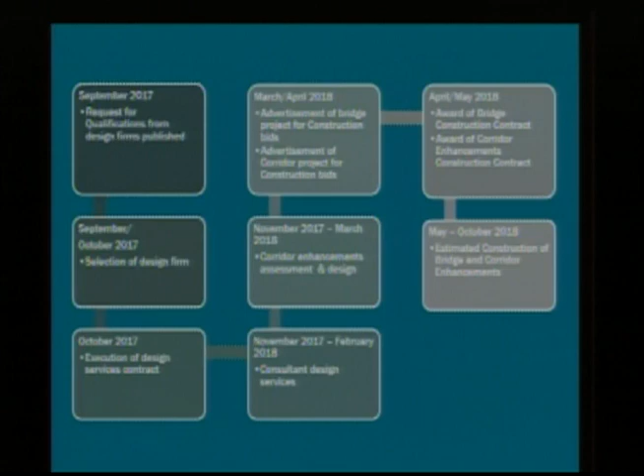So starting out, we're talking about the 3rd Street Corridor. As the mayor mentioned, this is not a discussion about the bridge specifically, but this began with the bridge in the budget last fall or last summer. You've seen this chart before, for those council members who were here in the fall. This was a flow chart, if you will, of the processes we're going to be proceeding through as it relates to both the bridge design development and the corridor work.

It really began in September of 2017, and these first 3 or 4 tasks are actually all complete now: requesting qualifications for design firms for the bridge, selection of design firm, execution of a design contract, and then the design process, which is actually underway for the bridge at this time.

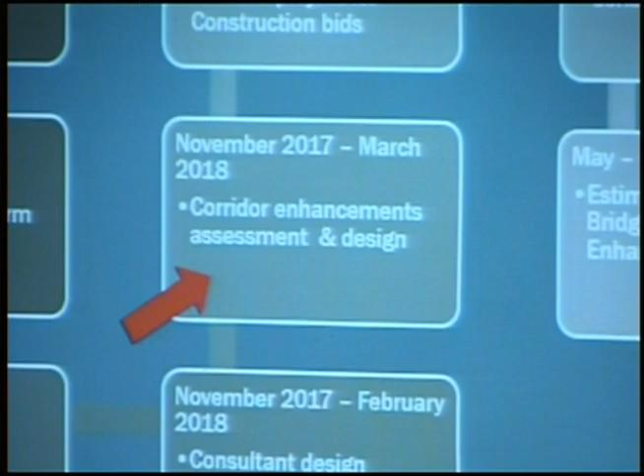The item we're here to talk about tonight is this one in the middle, which relates to the corridor enhancements assessment. We're right in the middle of this process where we've been working on the assessment, and depending on how the conversation goes this evening and what direction we may receive as staff, the next step would be to step into design services.

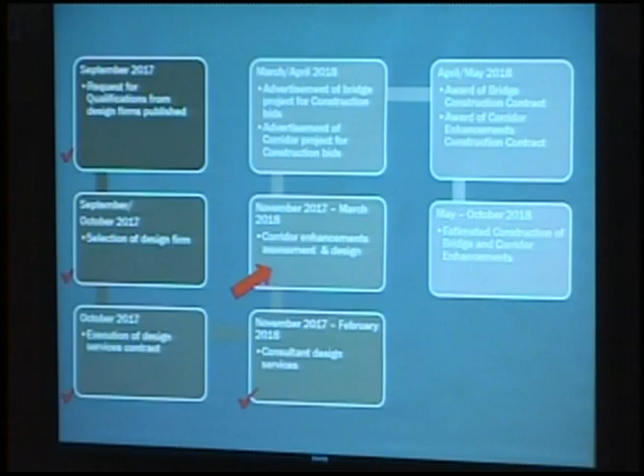Schedule-wise, that's anticipated to run through probably the March timeframe, give or take, anticipating that in the March-April window is when we'd be taking both projects out to bid for construction bids, awarding those roughly in the April-May timeframe, and then looking at construction of the bridge and the corridor improvements concurrently through this coming summer, with finishing of those 2 projects in the fall of 2018.

One of the tasks we have undertaken as staff is looking at doing an assessment of the corridor and trying to determine how best to manage any potential changes that may occur within the corridor. We made a request to the Transportation Commission to assist in that process, and the Transportation Commission agreed it probably made sense to form a subcommittee to do a deep dive into the subject matter, because there's a lot of things to consider when looking at a corridor and traffic management, traffic calming type features. So a subcommittee was formed consisting of 10 individuals.

We also brought in Mike Lowry as our technical advisor, outside tech advisor. He's a professor in civil engineering at the University of Idaho and does a lot of things related to the multimodal aspects we're looking at in this corridor, particularly bicycle transportation. And then I continued in my role as staff liaison to round out the group.

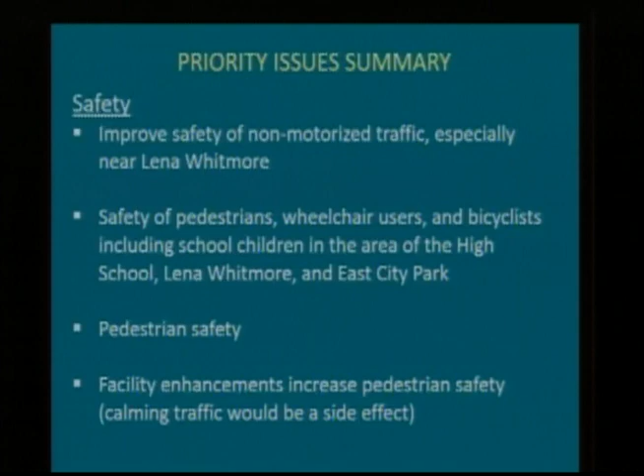And that we did enhancements to the facilities that would promote that safety and use of the system. They also talked about bicycle safety and really looking at it throughout the length of the corridor. Somebody suggested protected bike lanes in that early process, and then generally looking at what goes on around the schools and creating that overall complete safe network for people walking.

I should mention that in your packets tonight there is a table that has a list of all these types of things as well as some others, and kind of the status of what the subcommittee reached in terms of their discussions. Some of them they completed, some of them they just didn't have time to look at. Others they looked at some and said, we're not going to reach a conclusion, but it's just an item to think about.

The next grouping was really in the multimodal aspect or access, so this is a similar aspect with respect to safety, looking at all modes of transportation within the corridor. They wanted to encourage non-motorized transportation options.

They did identify, at least some of the members, that bike travel should be prioritized over on-street parking. That becomes a critical component as you look at some of these plans, because some of them do put in bike facilities at the expense of on-street parking.

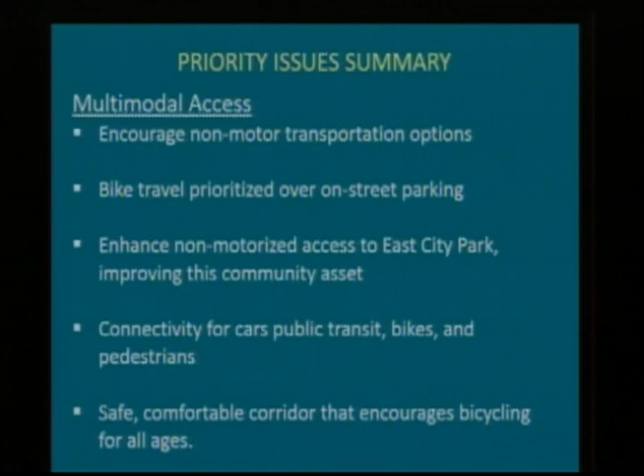Talked about enhanced access to East City Park, general connectivity improvements for really all modes, transit, bikes, pedestrians, and then creating that safe, comfortable corridor for the bicycling community.

The next grouping was limiting impacts. They understand that changes in the corridor have the potential to cause impacts to the users, to the adjacent neighbors, to the activities that occur within the corridor itself.

So they identified that there are residences and institutions, being things like the schools and the church, that are along the corridor itself. The concern about what is the impact of removing parking on the street adjacent to some of those uses.

They also, somewhat to the other side, said, this is a vehicular corridor, and we do have to remember that. And so we don't want to do things that are going to restrict the traffic flow to the point that it's not functional. So not overly limiting traffic flow was identified.

There were suggestions about truck routes and the thought of, is there some need to or ability to remove trucks from this particular corridor? And they talked about that some, but in the end did not reach a final conclusion for what to do with trucks.

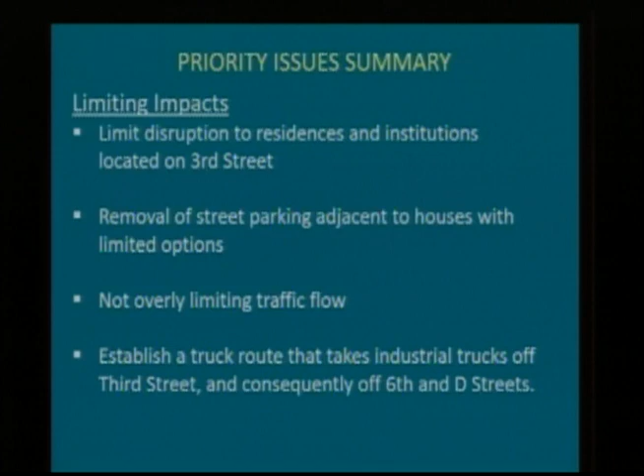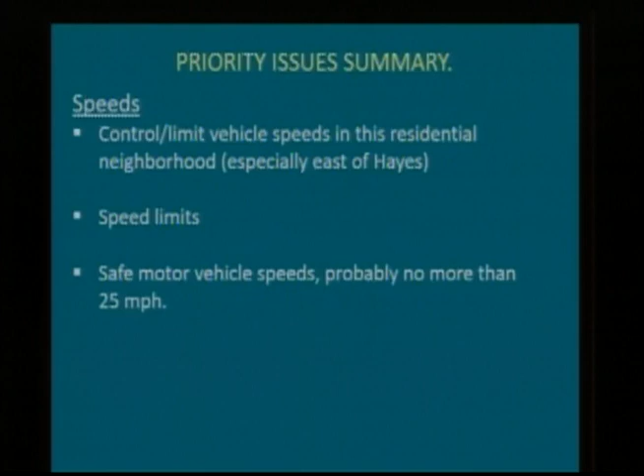Speeds were the next one. They wanted to make sure that we did control and limit speeds within the neighborhood, particularly east of Hayes, where it's going to see really the most significant changes in character of traffic that's out there today. Generally just looking at speed limits overall, and the suggestions were made early about limiting speed to 25 miles per hour.

They looked at traffic volumes historically, current numbers we were seeing, and accident history throughout the corridor, including bicycle accidents. There were 4 or 5 over about a 10 or 11-year period throughout the length of the corridor. They also looked at adjacent land uses and what effect we could have on those uses, plus the general modes of travel within the corridor.

They spent some time on the bicycle route and facilities plan, keeping in mind that the 2016 bike routes and facilities plan adopted by the council specifies 3rd Street as an intermediate level bike route, generally meaning higher volume or higher speed on that particular route.

They looked at the sidewalk system, whether or not it was complete — it is not. They talked a little about the lighting out there, street trees, truck routes, the kind of things that perhaps could be looked at some point, and then intersection traffic control, so whether there are 4-way stops, 2-way stops, things of that nature.

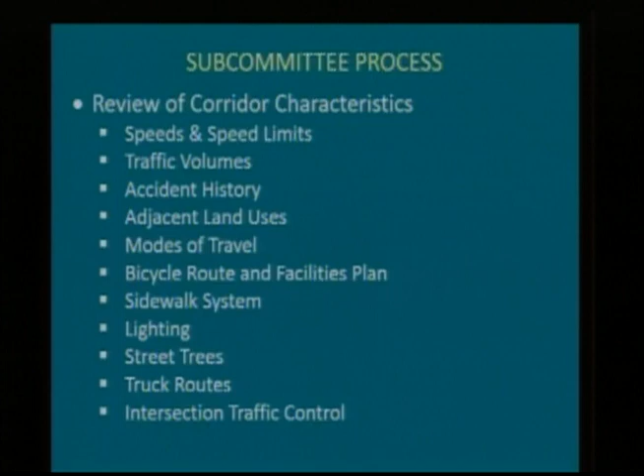In the end, the subcommittee developed 3 plans, titled Plan A, Plan B, and Plan C. Their general preference was Plan C, and a little later on in the presentation I'll go through some of the details of what's in the plans.

At this stage, I'm just taking you through the process of how we got to this evening, so you'll understand all the things we've gone through, how the public input process has worked, and then we'll dive into the details of the plans themselves.

After that 4.5-week intense period of time, we went back to the Transportation Commission at their meeting on December 14th. The commission felt comfortable with the 3 plans developed by the subcommittee and recommended that we start the public input process.

The public comment period was officially opened on December 20th, and on the 21st we finished a City Hall display right out here in the hallway outside of the City Council chambers. That display was in place all the way through the end of the comment period, roughly a little better than 4 weeks.

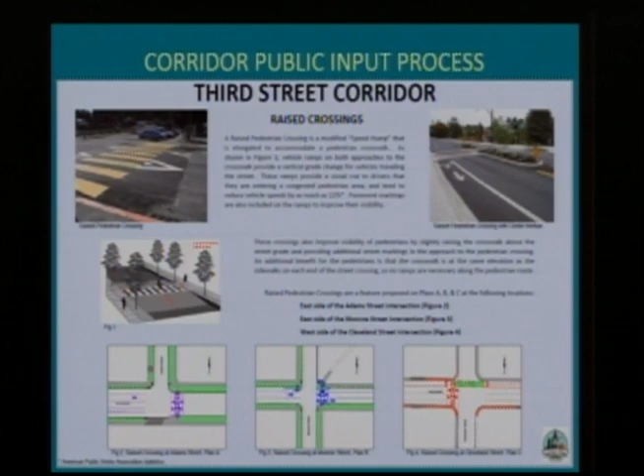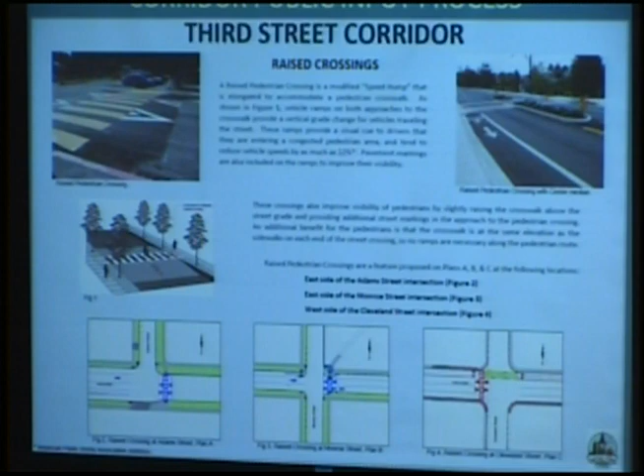Within that display, there were a series of poster boards that looked something like this one. This is one example. They all had specific topics that talked about either the plans themselves, what the commission was doing, or individual items within some of the plans. There were 12 of them in all on display in the hallway.

Things like this subcommittee board discussed what the subcommittee was doing. The overview talked about some of the common features of all the plans, then each of the 3 Plan A, B, C concepts, and then you get into the more specific items or individual components within some of those plans.

This is where things like separated 2-way bicycle lanes were introduced, which is a new feature within the city of Moscow. And then finally, a project cost, preliminary cost estimates for the 3 plans.

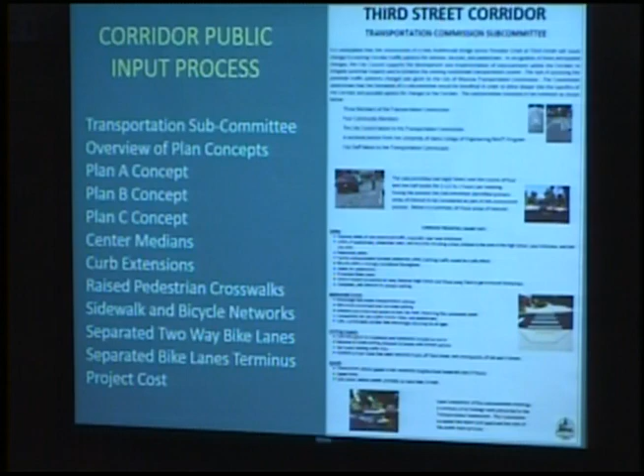This is just a shot of what it looked like as we were finishing setup. We weren't quite done, a couple of posters missing yet, but we had the posters on the walls all the way around, and a comment box set up here with cards on this long sheet.

This is about a 22-foot long plot of Plan C in this case, because that was the preferred one. Also on this table, there are 3 booklets on either end that have the complete plan sets for A, B, and C. And then we had this interesting little floor graphic here.

Plan C is the 2-way separated bike lane, and at its narrowest location, it is 3.5-foot wide lanes and a 1-foot wide buffer. This is a life-size replica of what that would look like on the street — 3.5-foot wide lanes from essentially a curb line to a center stripe, 2-way bike traffic, and this 1-foot wide buffer with some vertical elements between the bikes and where the cars would be.

So we did that to try to give folks a visual understanding of just how big that is. When you see things on paper, they don't always necessarily relate to what it physically would look like on the ground. So that was a feature that we included in that display.

We also held 2 open houses here in the council chambers, the first on January 11th, the second on January 18th. In those open houses, we put out the long strip plans, the 22-footers, for plans B and A, as well as some additional poster boards with these categories.

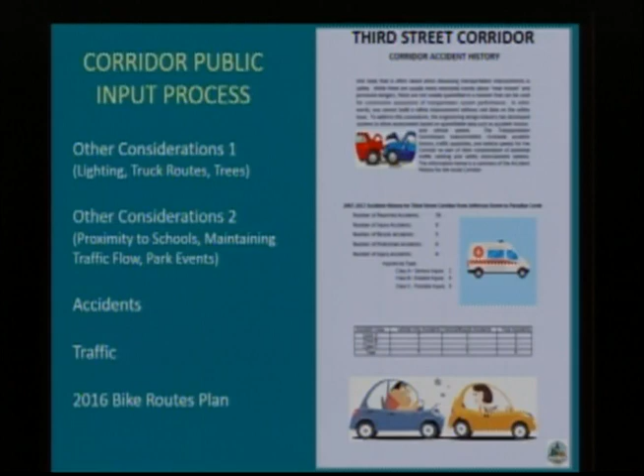We also had some boards with information on the accident history, traffic flow volumes, and the 2016 bike route plan. So that was part of the open house process on those 2 dates.

In the end, the public comment period closed January 21st. This date required the relocation or rescheduling of the Transportation Commission meeting for January. They pushed it back two weeks so we could have a couple of weeks after school started again at the university, so everybody was back in town, giving them time to participate, so it wasn't all during a holiday break when people were out of town.

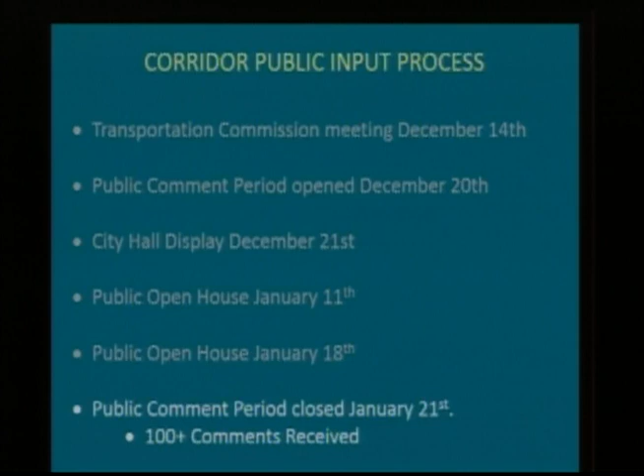In the end, we received a little over 100 written comments in the system via email and comment cards. Of those, about 40% stated a preference for a particular plan option. Some said this one or that one, A and B typically, but the large majority, roughly two-thirds, preferred Plan C out of the three options proposed, which is the two-way separated bike lane.

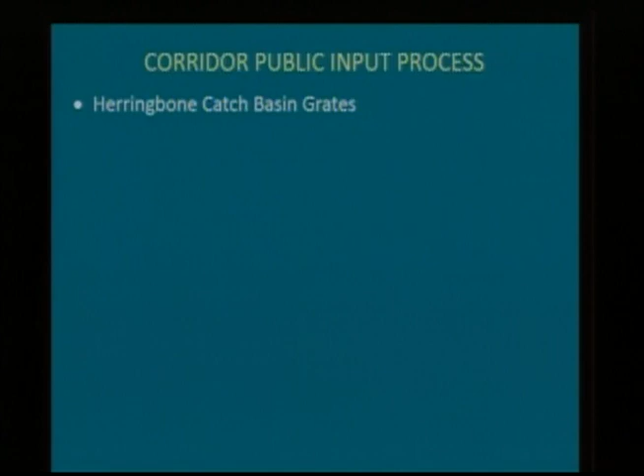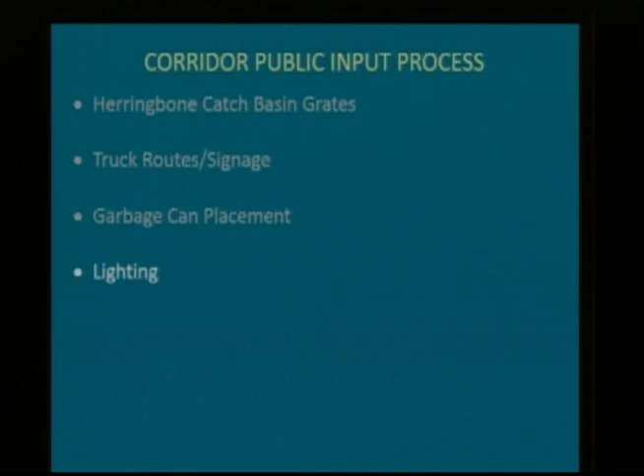There were other comments that popped up, things to think about as we go along. One was cleaning up some of the catch basin surfaces so they are not wheel catchers for bikes going across them with some of the grates. Again, addressing issues like truck routes and signage. Where do the garbage cans go? What do we do about lighting? Will there be improvements? A lot of these were just questions, with some comments upon them.

Some concern, fairly common, regarding what happens when we remove parking, particularly around the high school and the 1912 Center. Those are areas that are highly congested, with a lot of parking demand. Some concern about after-hour events, particularly at the 1912 Center — if we lose any parking within the corridor, that could have an impact. And events, particularly at East City Park, also a potential impact if some parking is removed in that area. So there were questions and concerns about loss of parking or potential loss of parking.

There were comments as well about general congestion at the high school with Plan C in particular, with the multiple lane aspect — are we going to create issues where there could be more conflicts? And another issue that came up a number of times was maintenance concerns, particularly how do you remove snow? That's primarily related to Plan C, which has more challenges than the other two with respect to snow removal, leaf removal, and things of that nature.

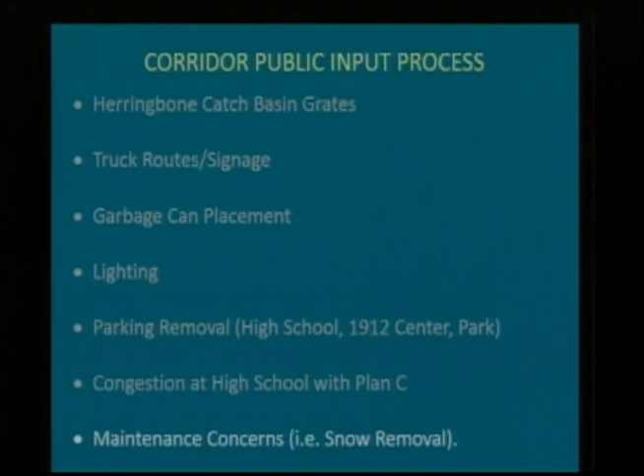The Transportation Commission then met on January 25th and went through the input that had been received. They all received in advance a summary of all that input and the actual scans of the individual documents submitted to us. Quite a bit of information — it's in your packets tonight as well. Hopefully you've had a chance to look at it.

The commission then talked about where do we go from here and what did we hear from the people? What should we now do? In general — and I'll generalize here because I don't necessarily want to speak for the commission — they did not seem to really favor Plans A and B. They did prefer Plan C, but there was some consternation about it, and they spent a lot of time talking about how best to address the issues of maintenance and overall safety.

On the maintenance aspect, it's that question of Plan C having a vertical element within the road section. So you cannot plow the entire road to the outsides — you have to plow one side of that vertical element or the other. It just complicates things and how best to manage that.

The safety aspect really relates to turning movements and what to do at intersections. When you've got multiple lanes of cars and bikes going through an intersection and a vehicle wants to turn off, or a third comes from a side street, we need to make sure there are no conflicts that create safety problems. They spent quite a bit of time struggling with how to manage it and where ultimately to end up in a recommendation. They did discuss briefly, a couple of times through the meeting, other alternatives.

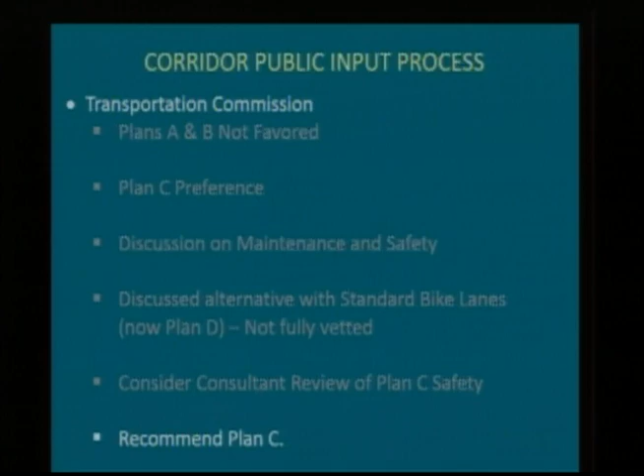That was something they seemed to like the concept of. They did not take any action with it. It's not part of the recommendation, but it did meet with some favor. Ultimately, after an hour and a half of gyrations on what to do, they went pretty simple and just recommended Plan C. So that is the Transportation Commission recommendation, Plan C. They did ask that we provide a good listing of pros and cons of each of the plans and concepts, and that's what's in your packet this evening, hopefully capturing the positives and negatives of each.

So to talk a little bit about what's in the specific plans, and then we'll talk a little about budget, and I'll wrap up.

There are some elements common to all 4 plans - things that regardless of which plan we choose, or even an alternative, we'd propose be included. First, speed limits. It was pretty unanimous among everybody we spoke with that the speed limit, currently 25 on the west end and shifting to 30 miles per hour in the center section from Van Buren to Hayes, then dropping back to 25 out to the east, be changed so it's 25 miles an hour the whole way from Washington to Mountain View Road - same speed limit the entire length. I hadn't run across anybody with any issue doing that.

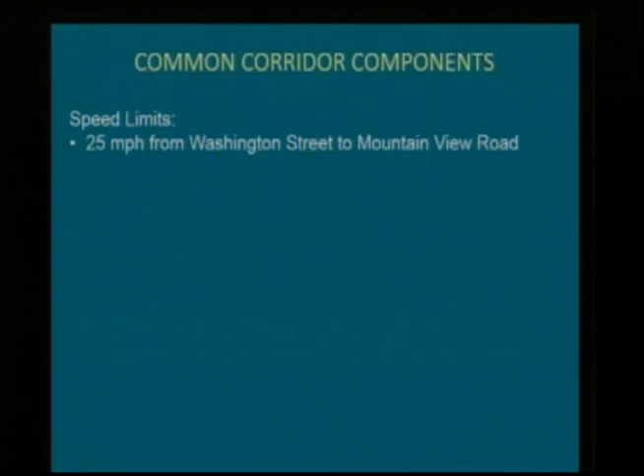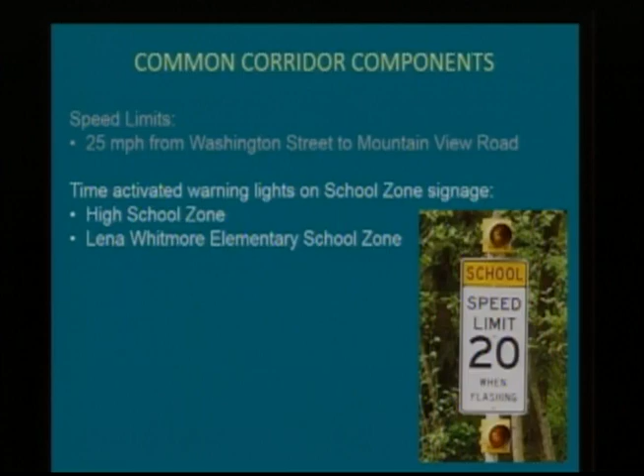One concept common to all plans is adding time-activated warning lights, like bouncing ball light systems, as an added visual cue on the school speed zone signs. When we looked at traffic speeds, the area with problems was at the high school, where speeds were quite a bit higher than they should have been, even though the rest of the corridor fit the speed limit signs pretty well. So we felt adding additional lighting on those signs to raise driver awareness of the school zone would be beneficial.

There are two of these locations, the high school and Lena Whitmore Elementary School. We'd suggest these run on a timer basis: in the morning just before school starts they'd be on, then turn off once school begins, come back on during lunch, then off again, and come back during the afternoon session when school's getting out, then turn off.

One thing we've found, common in the traffic industry, is that if you leave something on constantly, pretty soon it just becomes background and you don't even see it anymore. A lot of folks probably don't notice the blinking light above Adams Street right now, but it's there. If the lights come and go, they're more likely to catch your attention. So it's just an added influence.

Again, in all three plans, raised pedestrian crossings are a true traffic calming measure. American Public Works Association studies show a 12 to 18% decrease in speeds due to these kinds of devices. We're proposing three of them: the east side of the Adams Street intersection, the east side of Monroe Street, and the west side of the Cleveland intersection. I'll show you those locations in just a second.

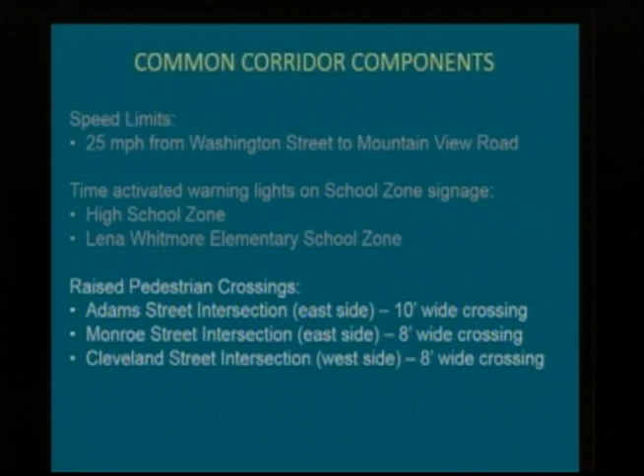They vary a little in width at the top of the structure and the width of the crosswalk itself. Generally, there's a road section with sidewalk on either side and a ramp that comes up. The street elevation rises from the gutter up to the height of the curb, matching the sidewalk on either side, goes flat for a while—8 or 10 feet wide in our case—then ramps back down to normal elevation beyond that.

This vertical ramp element isn't very comfortable if you take it too quickly, and the steepness of the ramp affects that—so if you're going too fast, hitting it is not a comfortable feeling, which helps slow people down, the whole idea of traffic calming. Through some of the markings you'll see, it also improves overall visibility of pedestrians, which is important at these key locations.

Here are a couple quick pictures: you can see a ramp, a marked crossing at the top, and a ramp down the other side. This is the standard marking on the ramp portion—as you approach as a driver, you see white chevron markings facing you, as well as the crosswalk ahead. From the pedestrian's perspective, there's a ramp coming up on either side, then a straight shot at level grade across the street.

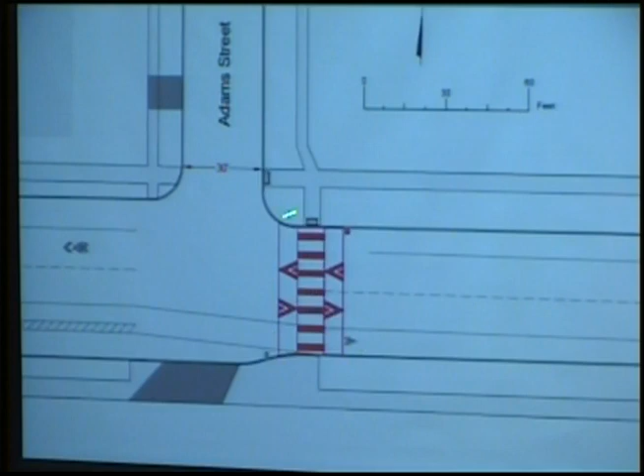As far as locations, Plans A and B, and actually all the plans, have a crossing at Adams. This rendering is the same for A and B: on the east side of the intersection there's a 10-foot-wide crosswalk with ramp up and ramp down construction. In the Plan C version with two-way separated bike lanes, it fits just as well—it works in any of the plans we've proposed. The second location would be at Monroe, south of the high school, by the 1912 Center.

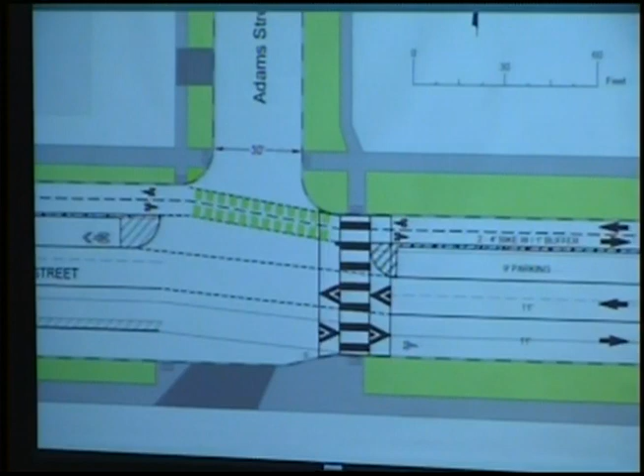Very busy crosswalk—this is the southwest corner of East City Park at Adams. Felt it would be a good location there as well.

This particular drawing is from Plan B, which has some curb bulbs involved. Plan C, again, with bike lanes going through, works well.

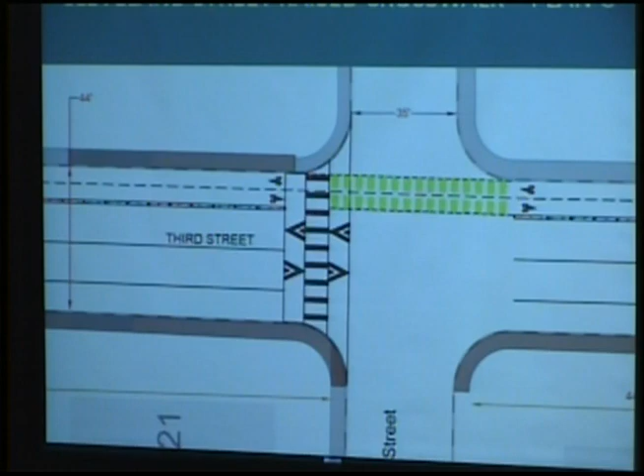The next location is out at Cleveland. Cleveland is on the east side of Lena Whitmore, behind the park area and playground, and there's a lot of kids that come up this way into the back of the school. That's why they chose this third location as a spot for a raised pedestrian crossing.

Other common corridor components: intersection traffic control. There was fairly unanimous discussion about changing the traffic control at the Hayes and Blaine Street intersections to four-way stop control. Today at the Hayes intersection, third street stops but Hayes does not. At the Blaine intersection, same thing—third street stops, but Blaine does not. These two intersections were seen as pretty important locations with high pedestrian traffic.

Generally speaking, the Hayes intersection is likely to see fairly even vehicle load distributions coming from north-south versus east-west. Four-way stops work well in those situations, and it's also another method for improving overall pedestrian safety at these busy intersections. Blaine, of course, is just south of Lena Whitmore, with lots of elementary school kids going through there, so we felt that was a good place to put emphasis on managing traffic and traffic speeds.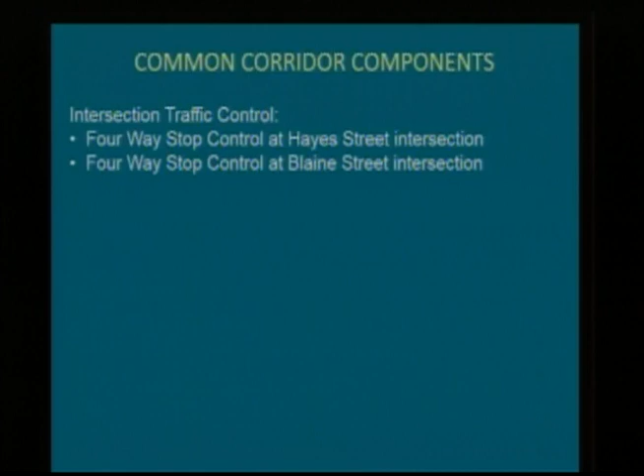Center medians, both ends, 5 foot wide up to 9, or even 10 foot wide, now optioned for a median on the west end—that's Washington Street. We didn't get that fixed; that's the Jefferson Street intersection. And then one near Mountain View Road, just some quick shots.

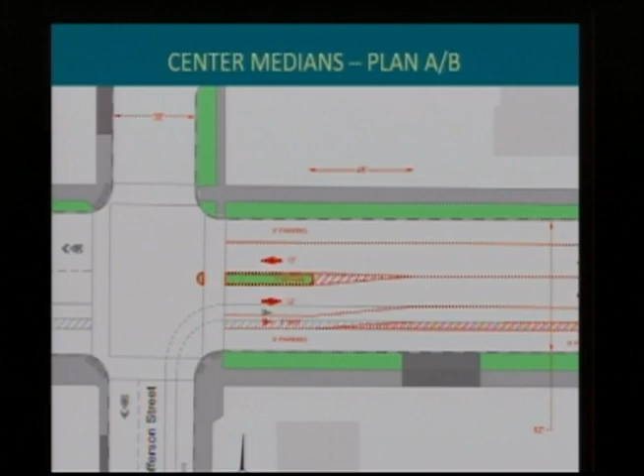This would be the 5 foot type median located just east of the Jefferson Street intersection, with the crosswalk cutting through it. And some realignment through here, a wider version, which does require removing some parking on the north side, but it gives you a much wider median, creating a pedestrian refuge—enough width that a pedestrian can come out on the crosswalk and wait here for a vehicle to see them and stop, out of traffic, with some protection.

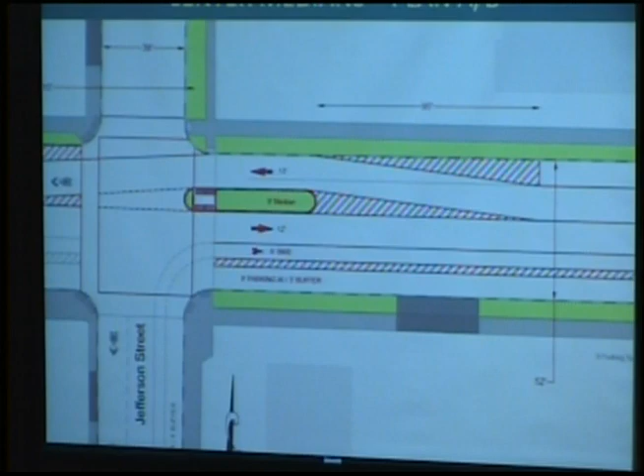The wider one—either of them really, but the wider one especially—gives us more options to create an entryway into this residential and institutional neighborhood as you're coming out of the downtown business district. So heading eastbound, this is kind of a statement that you're transitioning from the busy downtown commercial area to something different, so pay some attention here as a driver.

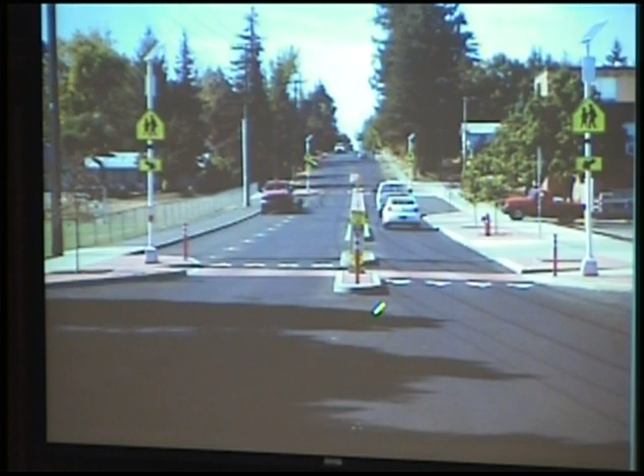A couple examples: this one is out on D Street, done a couple years ago in front of the middle school. It's pretty narrow, but you can see a crosswalk cutting through the middle of it. That's the idea—some kind of center median, probably a bit wider than this. Another one is at the University of Idaho by the bookstore; theirs is pretty long, with 2 crosswalks cutting through it, and some treatments at the beginning to help folks notice that it's there.

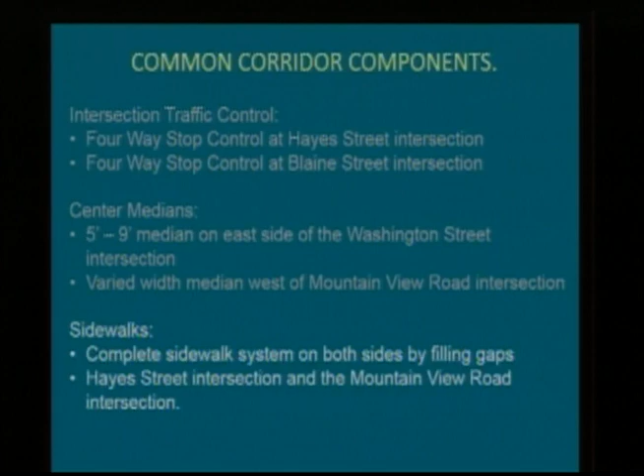The final common component is sidewalks. There's a desire to make sure we have complete sidewalks throughout the corridor, running from Mountain View all the way down to downtown Main Street. There are some gaps in that system, and the proposals would fill those gaps in all 4 plans. What you see here in red is the areas where we currently do not have sidewalks, and we would propose to construct them.

The actual location with relation to the curb will vary depending on what's out there. We work with property owners adjacent to these locations on things like landscaping and trees and other features, trying to fit sidewalks in where they'll be least disruptive, but also meet our needs.

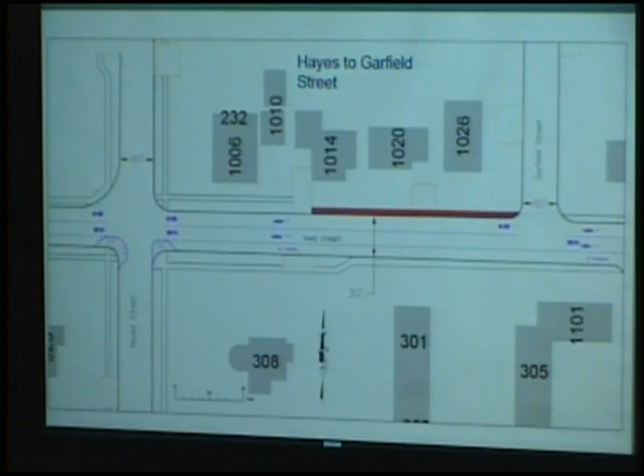So there's a section just west of Garfield, then some gaps here and to the west, and Grant on the south side, continuing from Grant all the way over to Cleveland, a little gap on the north side as well, Cleveland to Roosevelt, and Roosevelt over towards Mountain View. Of course, the area around the creek doesn't have sidewalk at all on either side at this point.

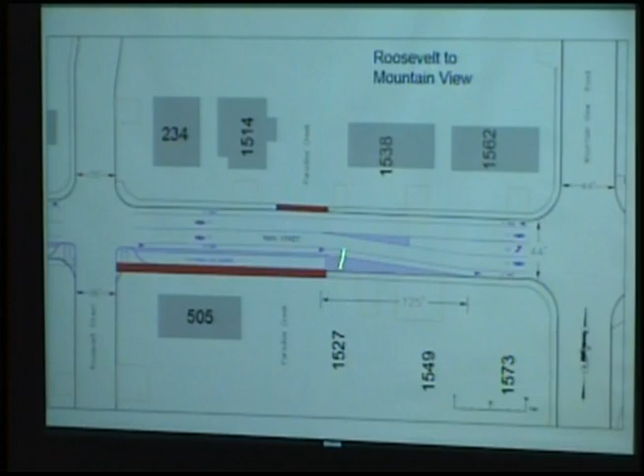Okay, so those are the common things, and again, those would be the things that we would build with any of the plans as proposed.

Some specifics about individual plans, because you're going to want to talk about which of these you like, and if you want to proceed with any of what we now have as 4 plans, or perhaps consider some hybrids or something different. Okay, so starting with Plan A.

Plan A and Plan B are very similar in many respects. They are the ones that retain the most parking. Plan C pretty much takes out a good amount of the parking.

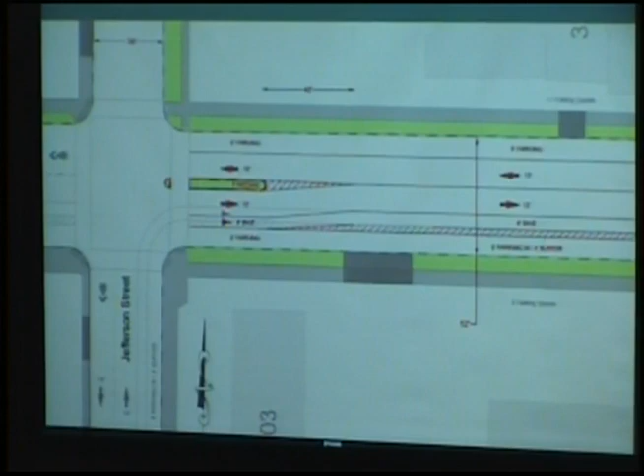Both Plan A and Plan B start with kind of the existing structure that we have out there today, which is parking on one side, then a buffered bike lane with the door zone buffer, and then a couple of travel lanes and parking on the north. So generally speaking, it sticks with that same structure that's actually on the ground today, with the addition of the median at Jefferson.

So that's what you see out there right now, looking up past the high school. There's the parking, the buffer, the bike lane, eastbound lane, westbound lane, and parking on the far side. So we would stay with that on those westerly blocks.

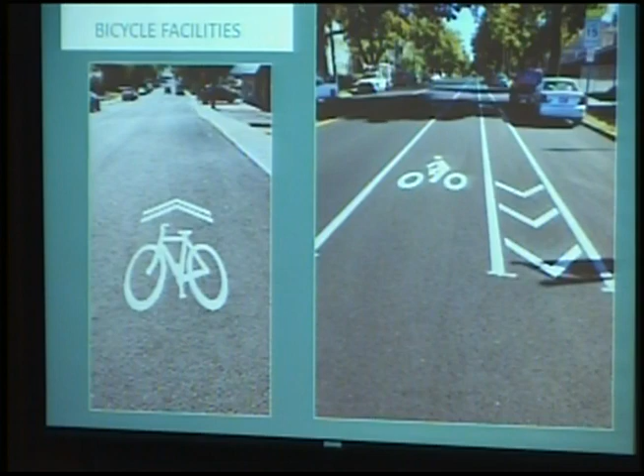As you go on to the east, now we're east of Adams, the parking on the south side drops out because the road narrows. Again, that's what's out there today.

And as we get up to Polk Street, the road narrows again down to 30 feet. So we would go to 11, the bike lane ends, and we go to 11-foot lanes with an 8-foot parking on the south side. Again, that's what's there today.

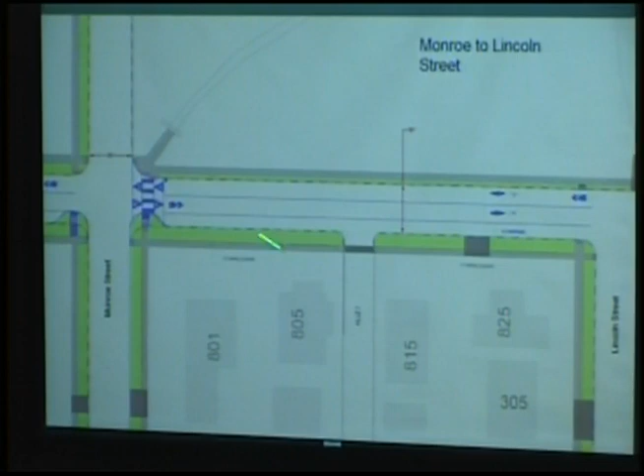The difference is we're starting to add in things like curb bulbs at various locations to help manage traffic. This is at the East City Park, where the crosswalk is, the raised crosswalk, again continuing that same cross-section, parking on the south, 2 11-foot lanes, all the way through Hayes.

Let's stop here for a minute and talk about curb bulbs, these little guys right here, and curb extensions, some people call them. We have some of these in the community, and essentially what they are is an area where you take that curb line and bring it out closer to the travel lane and then around the corner.

There are a number of reasons to do this, a number of benefits. One is it does mark the end of the parking, so if you have a parking area, it does that. To me, one of the primary benefits is it brings that pedestrian from a location where normally they'd be back here, and if there's a car parked right here, the driver has a hard time seeing them. By bringing them out here, they're actually out beyond the cars, and much more visible to somebody in the lane, whether it's a bicycle or a vehicle.

It shortens the crosswalk, so the amount of time the pedestrian's actually in the crosswalk goes down, and the overall narrowing of the roadway also creates a constriction so that drivers feel a little less comfortable going at speed, so again, they tend to slow down.

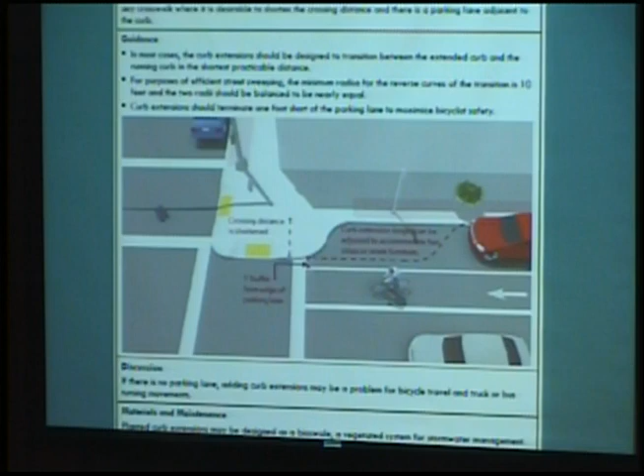So Plans A and B both use these pretty heavily throughout the length. A couple of examples, this is actually in the area of Lena Whitmore on the northwest corner of the school. There's a school there. You can see here where there's parking, there's a curb bulb that kind of shoots out from the original curb line, comes around a corner, and away you go.

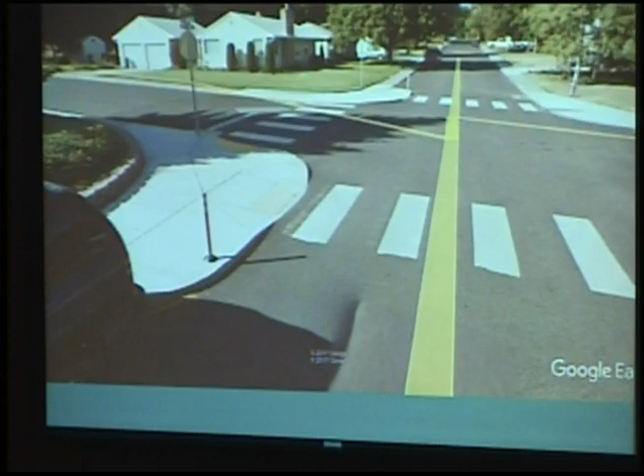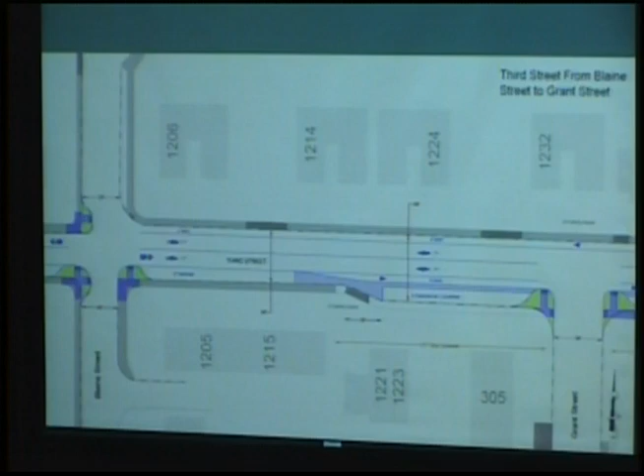So Plan A continues with that. We do pick up parking again about half a block east of Blaine because the road widens, and then we continue with that section, which is parking with the door zone buffer, bike lanes on both sides, and travel lanes of 11 feet all the way through.

When we get out to Mountain View, all of the plans go to a 3-lane configuration with a left turn pocket onto Mountain View with bike lanes, or well, I should say A and B, with bike lanes on both sides.

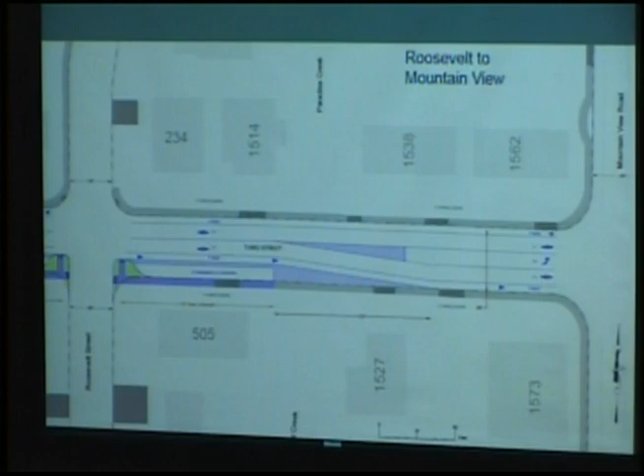Okay, Plan B, very similar. The main difference here is that we change sides of the street for the parking in a number of areas. So again, we start out with the same general configuration.

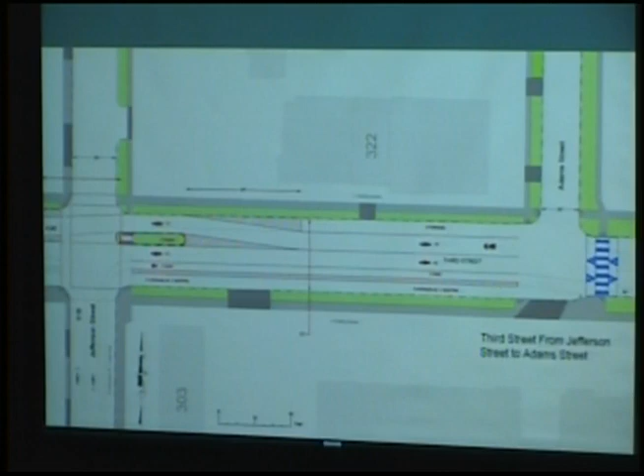In this case, we're showing the wider median there at Jefferson. Again, the raised crosswalk, the same structure that we've got today out there east of Adams. And then as you get into the 30-foot wide stretch of the roadway, we've put the parking on the north side

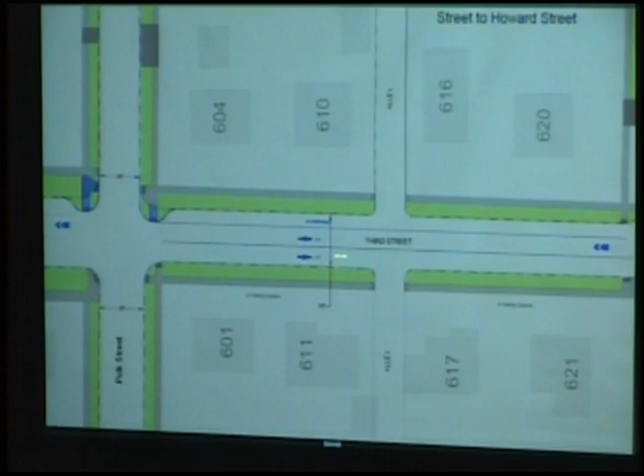rather than where it exists today on the south side. So that does make some differences when it comes to things like transitioning out of the bike lane into the travel lane, because we do have to put the bikes in the travel lane here. That's why the sharrows, and that's what we do today. But it makes that transition a little better than Plan A.

When you get down to the park, there's a little concern about putting parking up against the park side of the street because kids running around can't see them, ball comes out, you know, the usual story. So we want to avoid those kind of potential safety issues.

In the area on the west end of the park, I felt the type of park landscaping here and the usage is very different than the other areas. There's a lot of vegetation. It's not where the kids are playing ball much, that type of thing. So having parking there maybe is a reasonable thing.

But when you get to about midpoint on the park, it opens up. That's where the volleyball court is. A lot of the ball games and things happen. So moving parking back to the other side of the street was important.

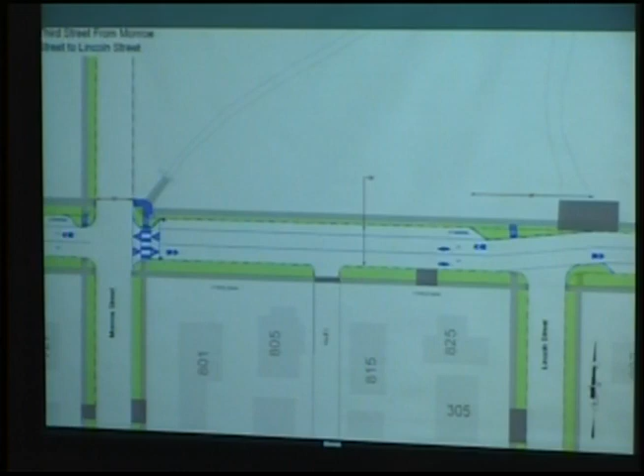So what you see here then is a transition through the Lincoln intersection where parking is on the north side and then it drops down to the south side here. And so the street has to take this lateral jog. So you're driving along and you veer left to get to the new alignment across the intersection.

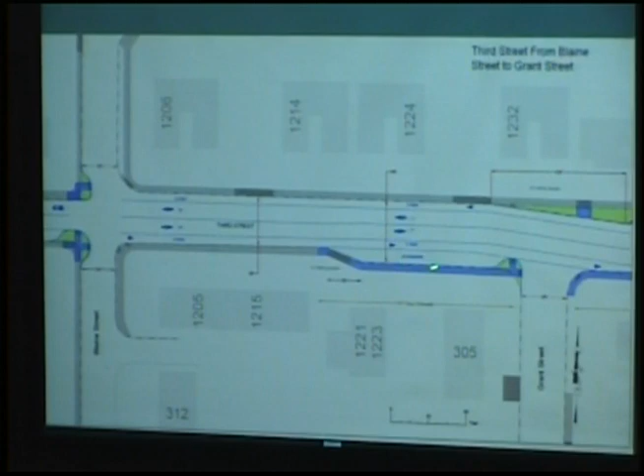And then we continue that section, parking on the south side through Hayes, past Blaine, and then we go to a 2 bike lane configuration, just like Plan A did. The parking starting on the south, but again, bouncing to the north side at the Grant intersection. So we then carry that north side parking all the way through to where it terminates before we reach the Mountain View section. So A and B, a lot of similarities.

They use curb bulbs extensively, I should say. They retain parking on at least one side of the street in the narrower corridor sections. They use bike lanes where we can, but in the narrow sections, they require bicyclists to take the lane. It's a shared use facility. Some folks aren't as comfortable with that because when you get into higher volumes on a street, shared use is, there's some limitations there in how usable it really is.

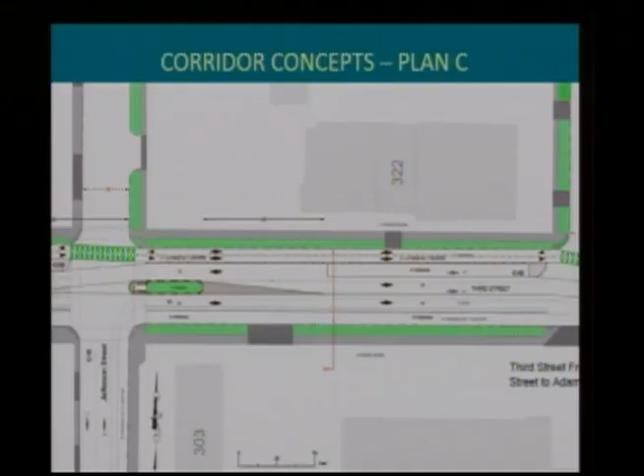So Plan C then was kind of the next greatest generation of concepts. This is one that includes a 2-way separated bike lane system. And just zooming in here at the Jefferson Street intersection, we would have the 9-foot parking on the south with the door zone still that's out there today, a 12-foot travel lane, a center median of some kind, a 12-foot travel lane westbound, and then a 1-foot wide buffer.

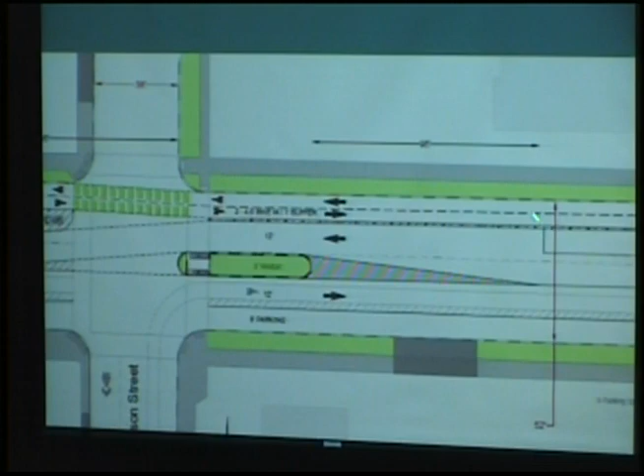Remember the picture I showed you? It would have those vertical elements, the little curbs, and then the delineator pipes that are sticking up, and then 2 bike lanes going in opposite directions right there. So at this part of the corridor, they'd be 4.5 feet wide. The narrowest they reach is 3.5 feet, and I think we get up to 5 at their widest point. So it varies depending on street width. There is a loss of parking in some areas as we go along.

A couple of shots of what these things look like. This is probably down in Portland, but similar kind of situation. We'd have a curb line, some width here, 3.5 to 5 feet to a skip stripe, another 3.5 to 5 feet out to the 1-foot buffer, then vehicular lanes out here with the little vertical delineators in there to help provide that message, if you will, to the drivers that this is a border, this is an edge, don't go into this bike lane.

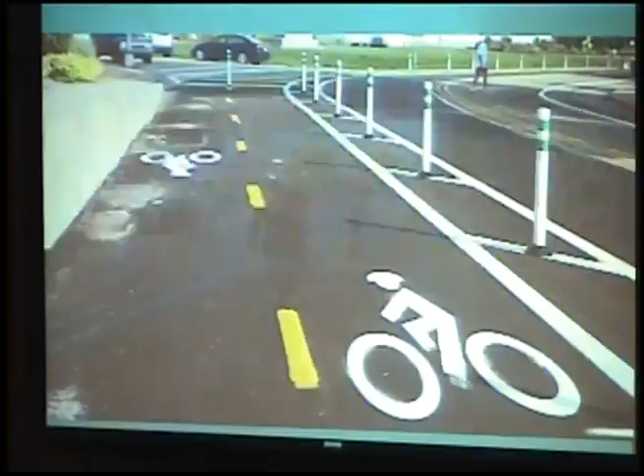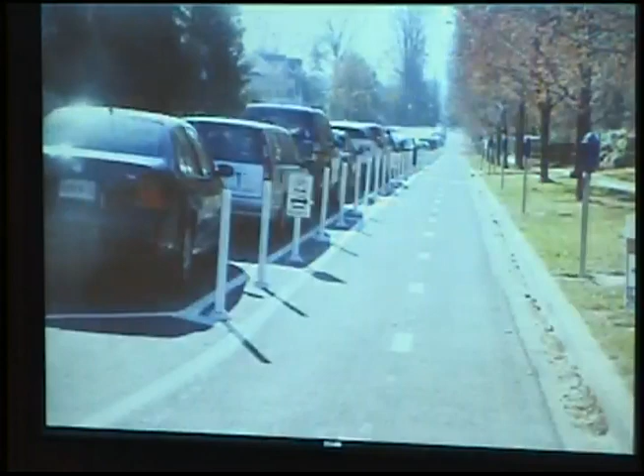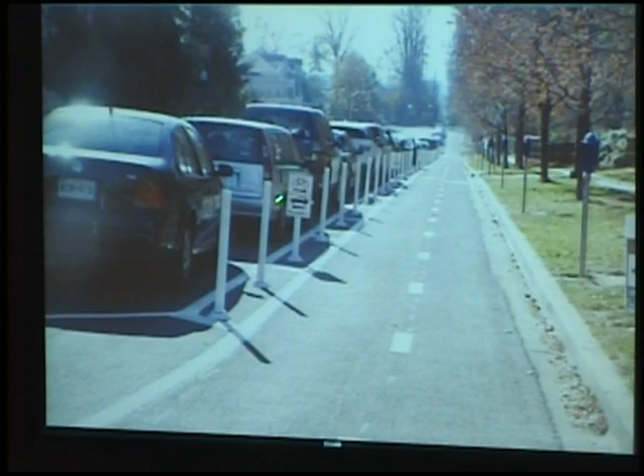This one may be very similar in size to what we're talking about. I don't know the exact scale, but just eyeballing it, this may be pretty representative. Where we do have room, particularly on the west end, there would be parking as the plan is proposed, next to the buffer. Now there's pros and cons with that.

One good aspect that people really like is as a bicyclist riding along here, this is an added protection between you and the traveling vehicle, because they can't get to you through the parked cars. Some of the downsides are if you're traveling along here and this guy opens his door, then you have the risk of encountering the door. In our case, the bikes would be coming towards us in this lane, so they'd be facing the front of the car, and the passenger would be facing them. So hopefully the visibility there is better than you might otherwise encounter, and you're less likely to have the conflict. But that is a potential issue.

The other concern with parked cars along here is this line of cars provides physical protection, but it also creates a visual barrier. So as you're approaching an intersection, can the cars out here see you with a row of parked cars in between? That's one of the downsides of this kind of arrangement. We do have this within Plan C. There are some areas where we could modify it and move that parking to the opposite side of the street. Other areas we have parking on both sides.

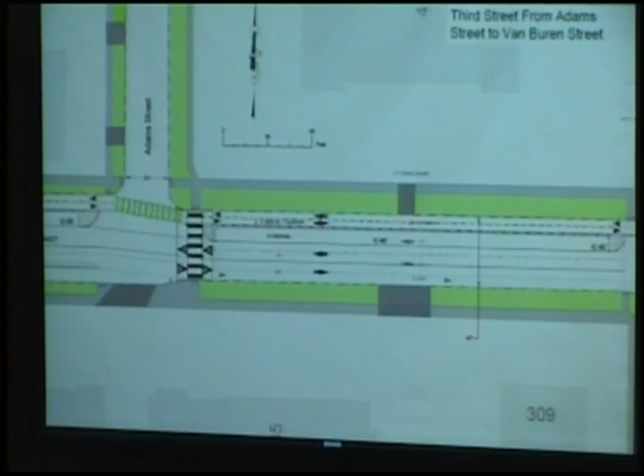So walking through from there, this is again the elevated crossing at Adams. You can see the 2-way bike lane on the top. Here's where we have that parking right adjacent to the bike lanes and no parking on the south side. That's one area where it could be flipped to the other side of the street if we felt that was a better situation. Then when you get to the 30-foot wide section up past Polk, all the parking goes away. There's no parking from Polk all the way to half a block east of Blaine. It's just 2 travel lanes, 2 bicycle lanes. And here you see those green crossings for the intersections.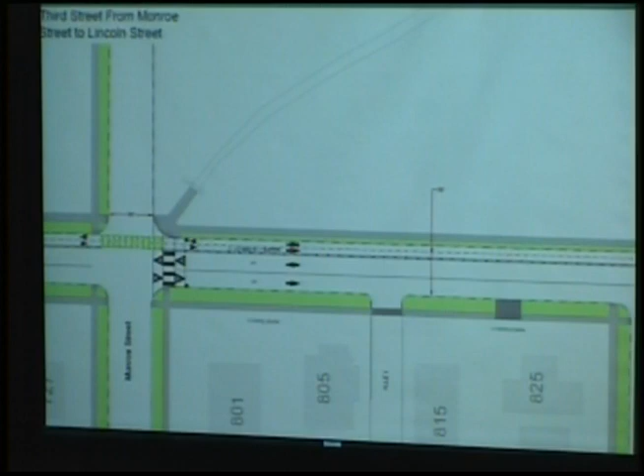At East City Park, and then coming out of it at Blaine, we go to a wider section so we can start adding parking back in on the south side of the roadway. The bike lanes continue with that configuration, parking on the south, until we start the transition at the Mountain View intersection.

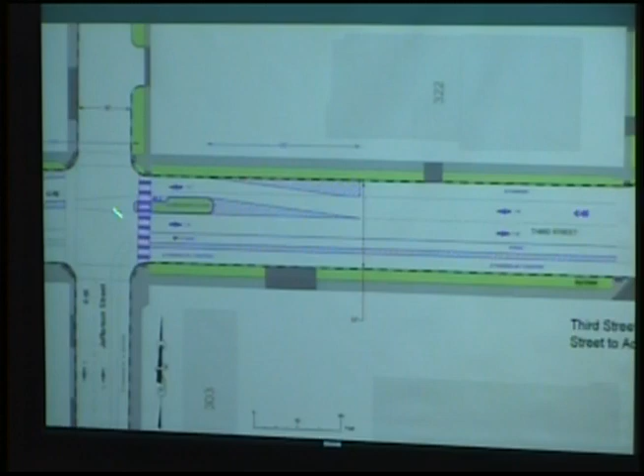Plan D, this is kind of coming late to the party, and I know folks have wondered how it came to be. I talked about that a bit earlier, but again, this was just trying to capture some of the suggestions from the public comment period and the discussion, as brief as it was, with transportation. Essentially it's a pretty basic concept using the existing structure that we have today, with the modification of adding an island in the median, and then going with what we have existing to the top of the hill. Once we reach Polk Street, where we go to the 30-foot wide section, again no parking, but instead of 2 lanes on the north curb line, we've got 1 westbound lane on the north, 1 eastbound lane on the south. They would be, as this is drawn, 11-foot wide travel lanes with 4-foot bike lanes.

We talked about, could we go to a 10.5-foot travel lane with 4.5-foot bike lanes? Maybe. Our standard vehicular lanes in our street standards for this class of roadway is 12 feet, so we're already under that, so there's a little question there. But as drawn here, it would be 11-foot with standard 4-foot bike lanes on either side, which again is the street standard we have today for collector arterials and minor arterials: 2 travel lanes with bike lanes on either side.

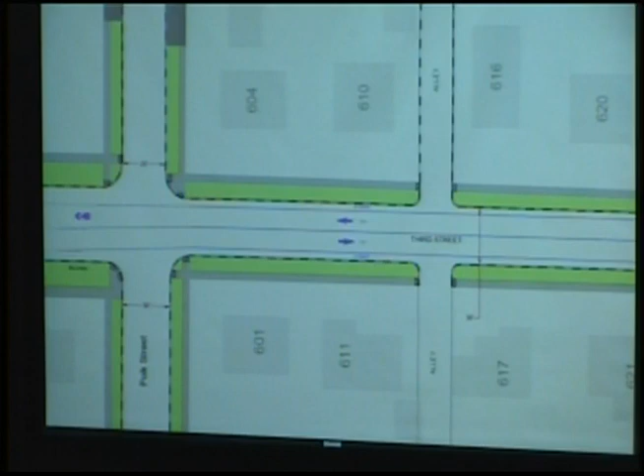And just how that would progress as you got out past Blaine, where we'd start picking up parking again east of Blaine, and then the transition back to the intersection at Mountain View.

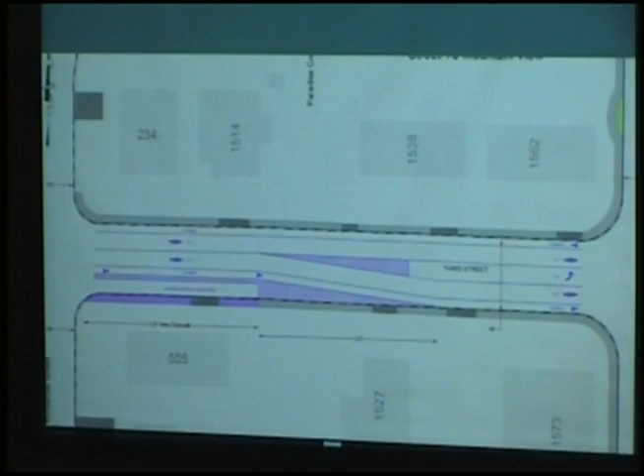So it's pretty straightforward. One of the things this option does, as option C does not, is resolve the maintenance challenges, because there's nothing other than paint striping in the road section to get in your way when plowing and street sweeping. It'd be similar to what's out there today with respect to maintenance. There's a diminishment in traffic calming, since you no longer have that vertical element next to the travel lane that makes you feel constricted. It's paint, and a narrower painted travel lane is a traffic calming feature, but maybe not as effective as having that vertical element that Plan C does in the buffer section.

Okay, so that's the plans, and everybody always asks about the cost, so we'll talk about that briefly. We did preliminary estimates and came up with construction numbers for the 3 plans. We added some contingency, 20%, because the way the market is these days you have to be careful. We also added some potential funding for design and construction management, not knowing if this was all going to be in-house designed or bringing in some consultant assistance.

So Plans A and B are very similar. They are the most expensive because they include a lot of concrete work. All those curb bulbs or curb extensions add to the cost, and that's where the biggest difference lies. Again, all of these plans include the common things, the 4-way stops, raised crosswalks, and all of that. But the differences you really see in pricing are due to the construction of the curb bulbs, that's a lot of concrete work.

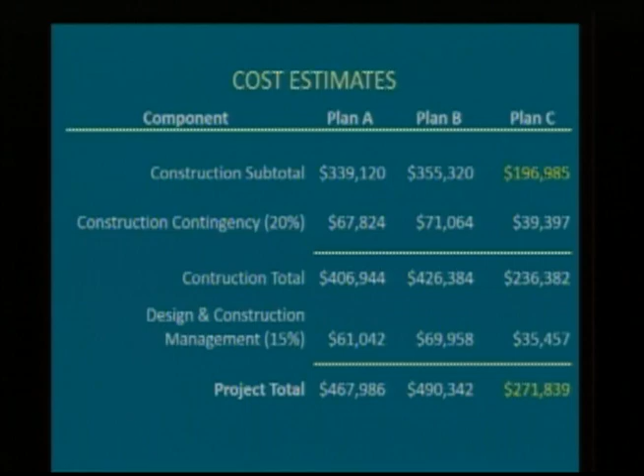Plan C is the lowest cost option among the 3, because the concrete work goes away and you're adding in vertical elements that really aren't all that expensive. These particular ones are in yellow because one of the things we identified looking at maintenance issues on Plan C was that there are portions east of Hayes on the south side where there's not a tree lawn to store snow. If we have to push all the snow south away from the vertical delineators, we need a place to put it, and since we're taking up all the road with travel lanes, the tree lawn becomes the storage spot.

Well, there's about a block and a half east of Hayes where the sidewalk's up against the curb. So we're anticipating those numbers would go up a little bit to potentially relocate that section of sidewalk off the curb line. We haven't run the numbers on it, but that's why those are in yellow. You can see Plan C costs come up a little bit due to that change if we implement it.

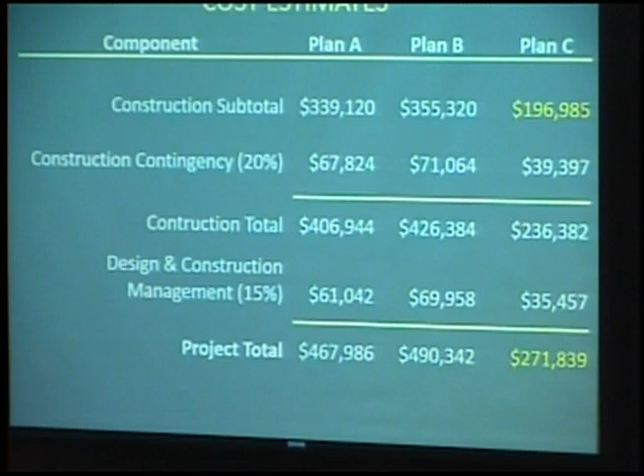I've not run a Plan D cost estimate. It's probably going to be similar to, but cheaper than, Plan C. Really, the element that goes away is the vertical components in the buffer. Everything else is paint, plus all the common core stuff. So similar, but probably a little bit lower cost, is what I'd anticipate for Plan D.

This thing's a little hard to see, but I wanted to show you this list. This is the Children Pedestrian Safety Project ranking. A little fuzzy up there.

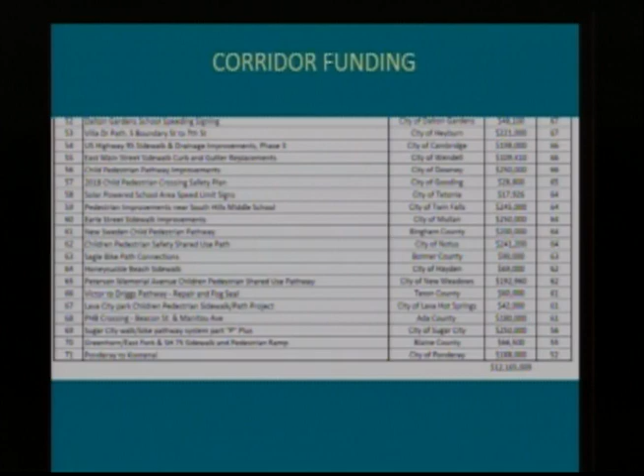This is a list that just came out recently, and this has to do with surplus eliminator grant funding for which we have applied. It was money made available for transportation-related projects, specifically in this case for children pedestrian safety projects. Overall, there were 71 projects that submitted for a total asking price of about $12 million statewide, and there we are at the top, #1 ranking in the state, which is really cool, frankly.

We were really pleased to see this. We believe the legislature's reached the point now where they've taken the actions necessary to allow this funding to occur. So we're waiting for the notice from the granting agency as to whether or not we will actually receive this.

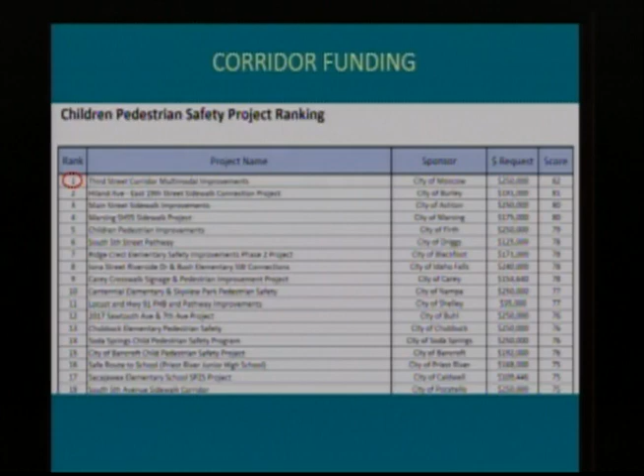We anticipate that we will get that ranking, and this is intended to help pay for some of those improvements within the corridor. This will supplement the funding that we've already established within the city budget, but it's just added funding to help us manage the cost within this corridor. So we're really pleased with that, just wanted to point that out.

At this point, I think what's before you is figuring out how you would like to proceed. Really, there's the question of is there a preferred plan? A reminder again that Plan C was the one preferred by the subcommittee, and ultimately was the one preferred by the large majority of that 40% of the public input that stated a preference. The Transportation Commission again recommended Plan C.

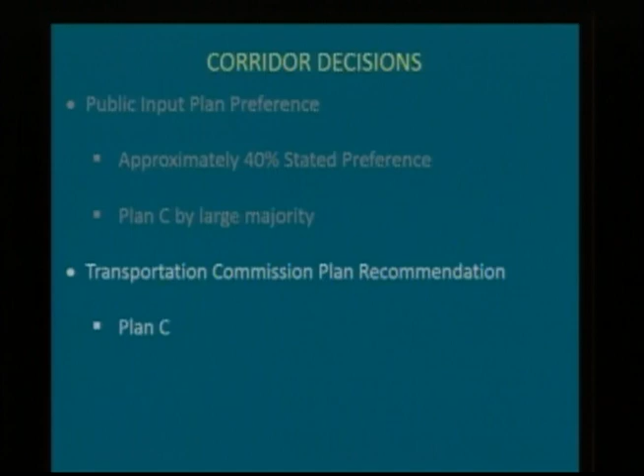And then that takes me to the staff recommendation, so my opportunity to tell you what I think. Really, what we are suggesting is that we proceed with the design of the common features, all those things that are common to all the plans. We can start those really regardless of a decision tonight, assuming we're moving forward with corridor enhancement work. We could start that process of designing those features.

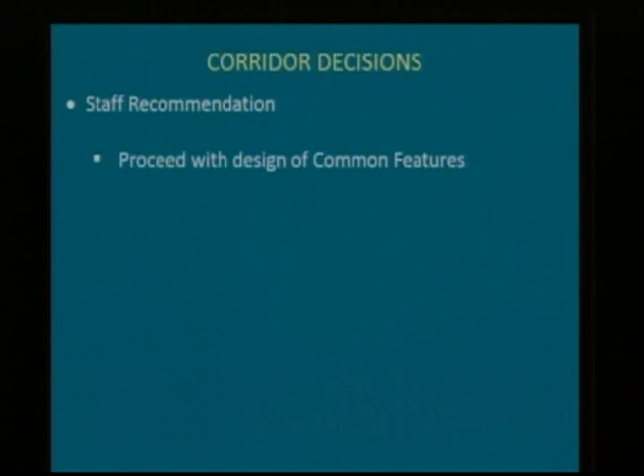We would recommend that we do hire a consultant to do a safety review of the two-way bike lane concept, to help us understand if the concept we've proposed will provide a safe corridor, including those potential conflicts at the intersections that we've talked about. Bringing in somebody that does this on a regular basis, who's seen these applied elsewhere, who can help us identify that yes, it works, and here's some things you can do, whether it's education, signage, whatever it may be, to make sure it works. Or conversely, they might come back and say, well, it's maybe not the best application because of these reasons.

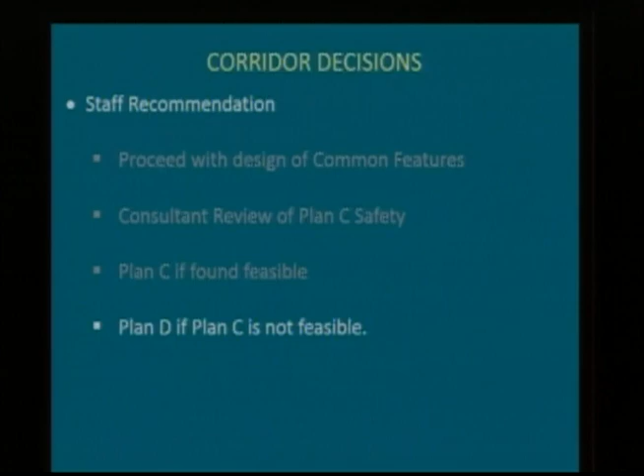Okay, so depending on how that comes out, I think it would be very beneficial for us to receive that further information to make sure we are doing this correctly if Plan C is the way we are proceeding. If they come back and say yes, that all looks wonderful, our staff recommendation is that we would proceed with Plan C, so we're consistent with all the other input you've heard this evening. If, on the other hand, we find it is not feasible for reasons they would identify, and we're not able to find alternatives to fix those issues, then staff would suggest probably considering Plan D as maybe the next best choice. A and B just did not get a lot of traction with the community, and I think it had a lot to do with the fact that it was the shared bike lanes creating some concern.

Plan D has its own issues, obviously. There's some concern about is there enough traffic calming involved. There are features, again, consistent with all the plans, so we would have traffic calming as well. So the thought would be that probably Plan D, from a staff perspective, might be the next best choice.